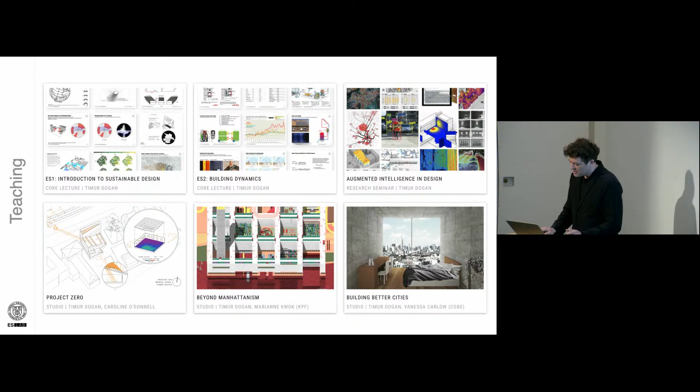I also direct a small research lab, a cross-disciplinary group called Environmental Systems Lab, which currently consists of 3 systems engineering students, 1 planning Ph.D. student, a postdoc, and 6 undergraduate researchers. I want to mention them today and thank them for all their dedication and hard work. You'll see some of the work which without them wouldn't really be possible at all.

So just to start off, what motivates us? I think it's these 2 overarching questions: how do we build sustainable and livable cities for 2 billion new urban dwellers? That's, if you think about it, 250 times New York City, the population of New York City. And then how do we decarbonize the built environment and mitigate climate change? If you look at the diagram on the left, you see that more than 50% really is attributable to the built environment, how we construct cities, how we build our buildings.

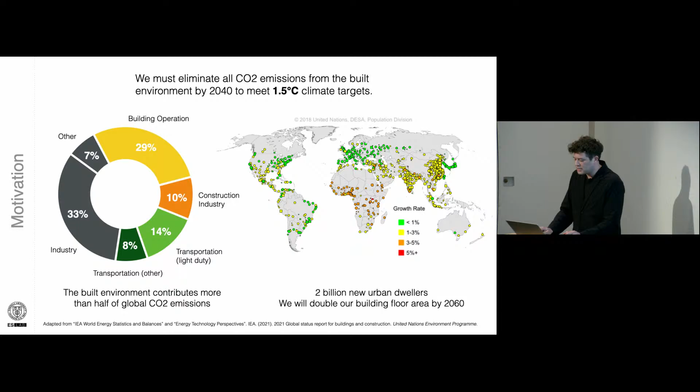The underlying philosophy to me is, coming from an architectural background, I always understood design to be a smart response to the environment, to the context, to the site, and to really enable designers to create these kinds of responses to the environment.

I think we can help that by augmenting and informing the design process with building technology, software tools, and data to help designers arrive at better performing solutions more quickly.

It's a multi-objective challenge where we need to look at many different variables like energy and carbon, active mobility, comfort and well-being, and daylighting. They're all kind of proxies for quality of life, as architects striving to create a more livable environment for us humans.

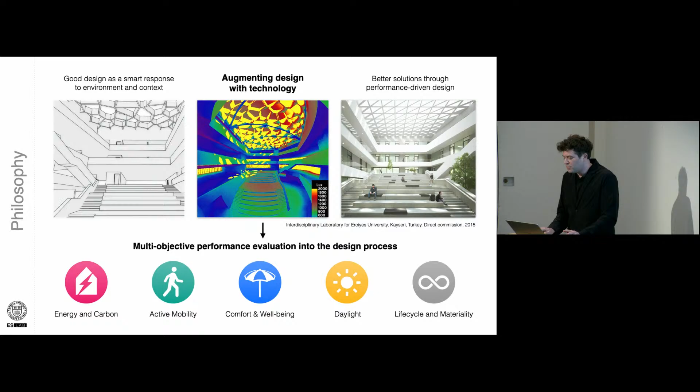In the design process, however, one of the biggest challenges today is that analysis really happens too late in the design process, in the creative process.

This is actually borrowing from a systems engineering theory that came out of shipbuilding. You see the reference at the bottom, where they really researched this understanding of what happens when you bring information and data into the decision-making process early on. You can basically influence the design more radically, more quickly, with a reduced cost.

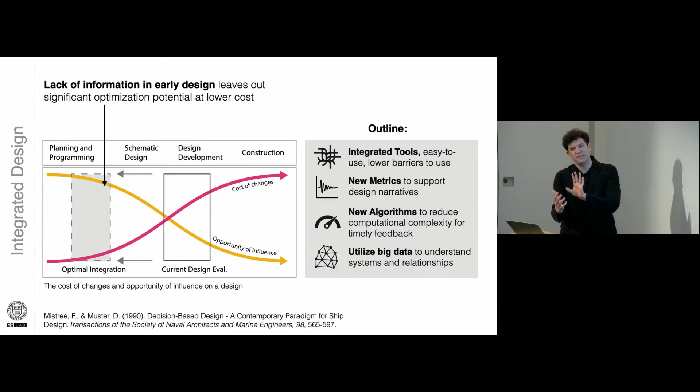So what are the ingredients we need to move this evaluation of design, this use of data in design, earlier into the design process? To me, it's four components. On the right-hand side, integrated tools that are easy to use and lower the barrier of entry to people who are designing, who are creative thinkers but not necessarily trained as engineers.

We need new metrics that support their design narratives, not necessarily the established way of measuring performance in a building. And we need new algorithms to reduce the computational complexity, to be more responsive, to give feedback in a timely manner.

And the fourth one is about the use of data and big data. We're collecting more and more data of our built environment, of our daily lives in cities. How can we leverage that as designers to create more informed design decisions?

I want to share a cross-section of my work that touches upon these four main points today. So, integrated tools—this is a screenshot of a software called ClimateStudio, an advanced daylighting and energy simulation tool that seamlessly integrates into Rhino, a popular design environment, and provides direct visual performance feedback during the design process.

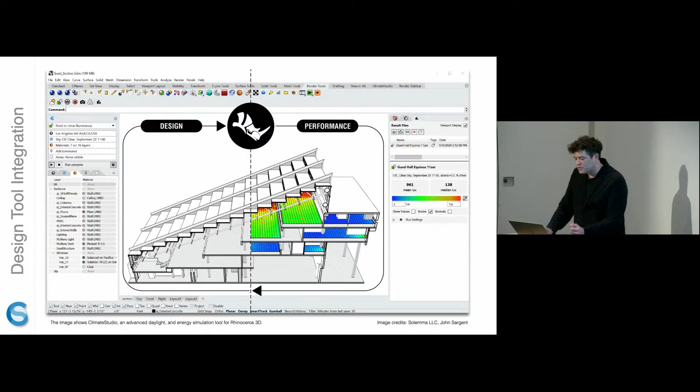This software has its roots in what Christoph mentioned, the early times when I was still a student working with Christoph and three other collaborators back at Harvard and MIT. It's one of those tools that offer highly integrative workflows directly embedded in an architectural design environment, and it's used widely in practice and taught in over 400 universities worldwide.

Just to show you how you could use a software like that in the design process, I'm going to walk through a really quick case study. I'm not going to do the architecture justice, but just to explain the principle.

Imagine you had a highly insulated house with very low thermal mass. In this case, it's a school built out of hay blocks in Denmark, where you quickly see that with the amount of openings you're controlling here, you get an overheating problem.

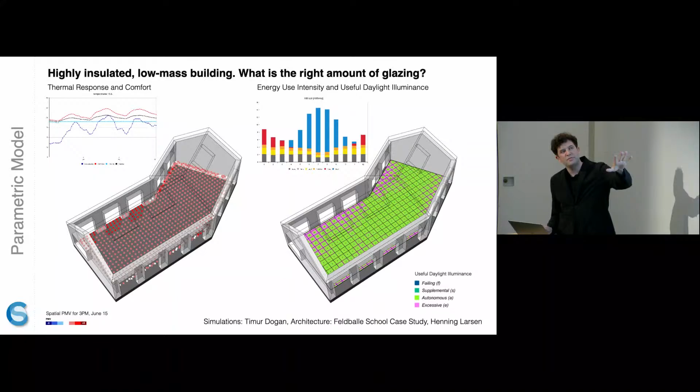How can you mitigate that? How can you find the right balance between the openings that are there for views and daylight, the energy consumption that's a function of that, as well as the indoor thermal comfort, mapped spatially here, where red basically shows overheating due to the increase in solar gains and the mean radiant temperature in the space.

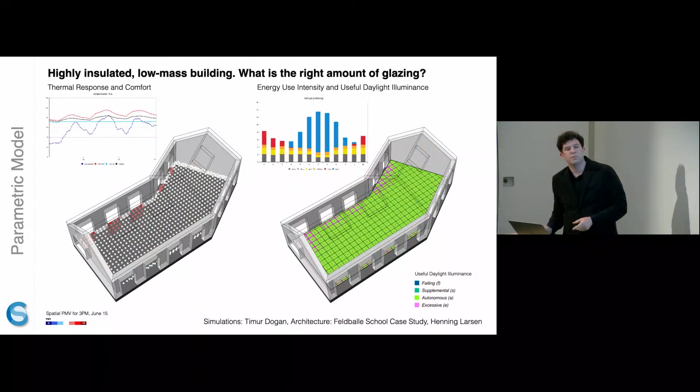With this being easy enough that any design student in the world can do this kind of analysis quickly, it really becomes more about the intellectual challenge of connecting these analysis methodologies with the design narratives.

That's increasingly what I find in my teaching, and that's actually the exciting part, where we get to combine design thinking with this kind of analysis.

But we also have to be critical of the metrics that we are using. So as architects, we need to participate in the development of new metrics and make sure that these do actually capture the things that we care about.

Let me give you two examples of some of the recent work that we've been doing. This is showing you the state of the art of daylight analysis in buildings. We're looking at a 3-dimensional model where we can simulate the illuminance profiles in that space. And then typically what we do is pair this with an occupancy schedule and a target illuminance that is a minimum requirement in the space so that you can perform your seeing task.

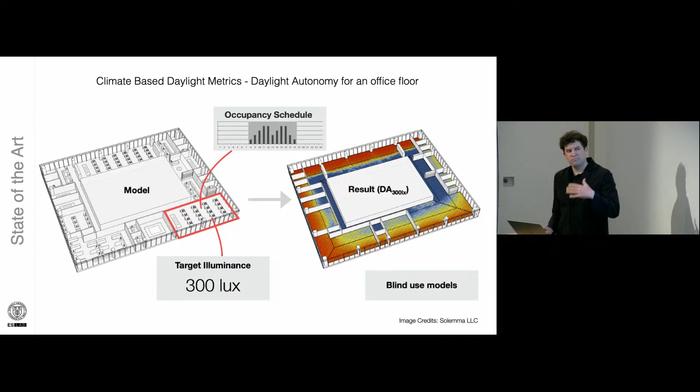That can be summarized statistically in a metric that we call daylight autonomy, which you can see plotted on the right-hand side. It's a great metric, don't get me wrong, but it's primarily developed for work environments. And the question is, can we translate that into other building uses, for example?

When I think back to my time as a student, I was thinking very differently about daylight in architecture, especially in residential architecture, where the presence of direct sunlight is not always a bad thing, whereas in the office environment we think about it as a glare problem, and the way we diffusely light a space in a residential architectural setting.

This is work by an undergraduate student who I actually met in my first semester at Cornell, which was very exciting to work with him over the 5 years of his B.Arch degree, where he basically dissected the way we really simulate daylight in buildings.

He looked at whether we can visualize the amount of light in these seasonal and diurnal bins and then talk about it more qualitatively. You can see there's a drastic difference, obviously, and the average that we tend to always look at as daylight simulation modelers is not really conveying the temporal differences.

So in the winter evenings and winter mornings there's barely any light in the space, and then in the summer you have a fully lit, fully daylit space.

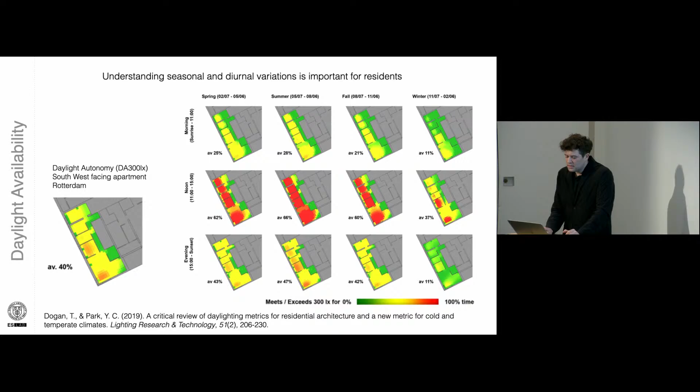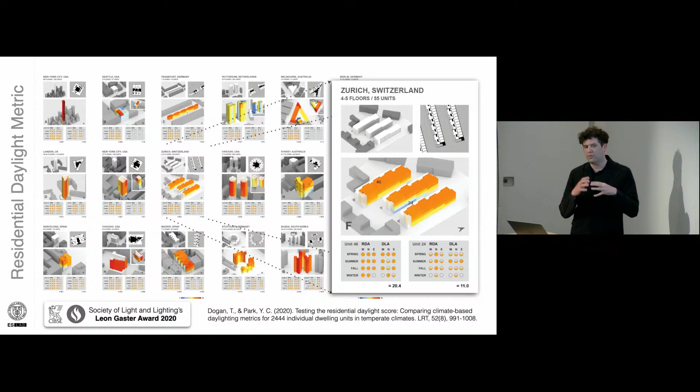This is coming out of a series of papers talking about the subject matter, and I think the final result was the scorecard, where you could quickly see which apartment really is for you. With just a glance, you can understand when this apartment has access to direct sunlight, when it's sufficiently lit by daylight, and when there's not enough light in the space. So you can understand the temporal fluctuations really quickly and think about what that means for you as a potential occupant.

If you're more of a morning person, you really do want the direct sunlight on the balcony or on your kitchen window or so forth. And if you're more of an evening person, then maybe the evening sun is more important. I think that's something this metric highlights really beautifully.

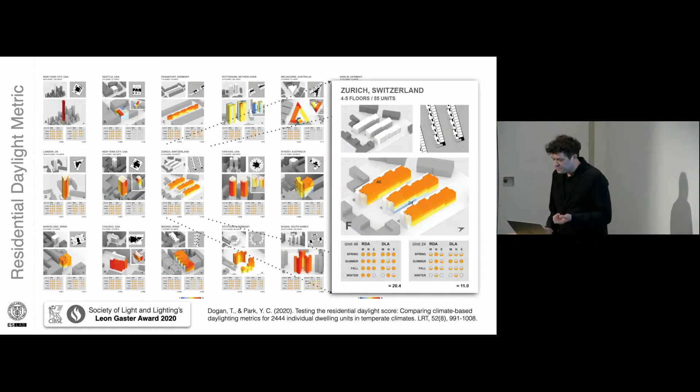The second example that I want to bring about is talking about view. We consider that a design quality, talking about views to the outside, and view relationships between spaces on the inside.

As you can see in this example, I think you all know the architects, but they were clearly thinking about that. There are diagrams that are evidence of this, and there's a beautiful way of dealing with spaces that orient themselves towards the outside, look outside, and have a clear view relationship with the outside, and then spaces that are much more introverted, that look inwards into a courtyard, or have relatively smaller openings to the outside to frame the views.

These ideas are really difficult to grasp in building science terms, let's say. We all know that there are benefits to view. In hospital wards, patients recover more quickly with view. There's measurable work performance in spaces with good view. And Christoph Irmak's work and Andreas Czegut's work showed that there's an increase in real estate value if you have good views.

But the metrics that we agreed upon as a practice or as a profession, like for example LEED's view analysis and the European standard for measuring view, really shortchange architects in that kind of way of thinking, where it's more of a pass-fail, just preventing the worst-case scenario, basically a windowless building.

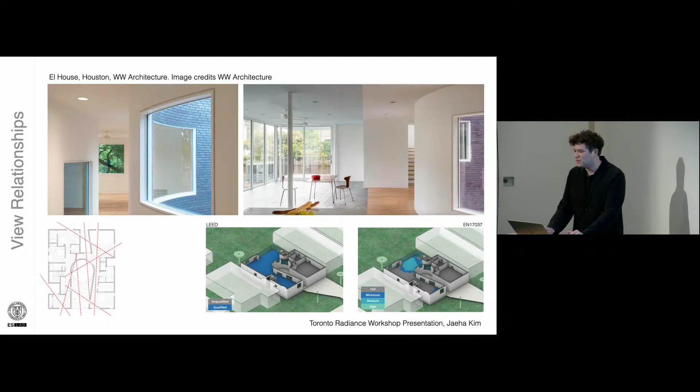So we started this multi-university research initiative where we started thinking, together with Stefano Schiavon at Berkeley and Won-hee at New Jersey Institute of Technology, about ways we could collect data together in a meaningful way, coordinate experiments, and plan how to collect data so we can capture all the different nuances about views. We're planning online surveys, VR experiments, and asking fundamental questions like how you can use VR experiments for these kinds of analyses, and how the results might be biased.

This is more of a long shot, but there are some preliminary results I want to share. This is work by a PhD student in my lab, Jae-ha Kim, who developed this survey as preliminary work and input around 1,000 different view scenarios. We now have over 300 participants who ranked these 1,000 view scenarios, so we have a very diverse set of view scenarios that hopefully capture what one would encounter in a design process.

And then we trained a machine learning model that can do this view satisfaction ranking of the space, and you see much more fine nuances in the results. Again, this is preliminary data.

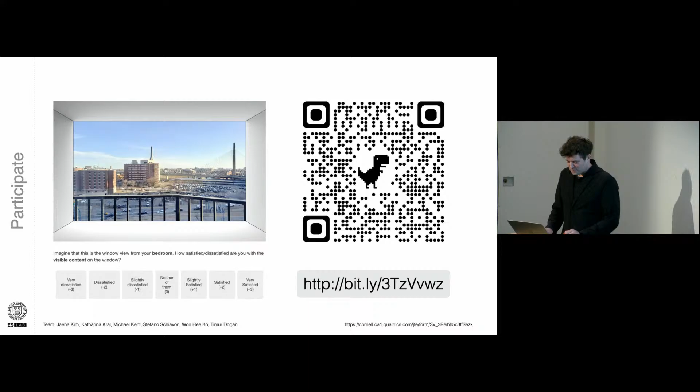All right, I'm jumping in scale from building scale to urban scale. So when we talk about buildings and design them, looking at what happens around our buildings is also important, and as designers we do care about that, and our design actually has a huge influence on that as well.

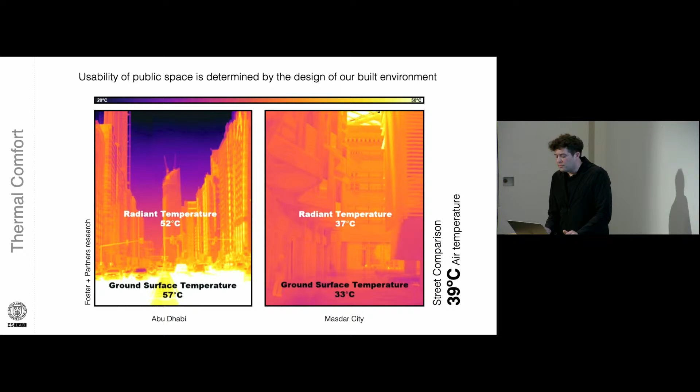I always use this photograph by Foster and Partners that they did for pitching their design ideas for the Masdar City design in Abu Dhabi. This is both in Abu Dhabi, one shot taken at the city center with streetscapes that are basically unbearable to walk in or spend any time, and then using more vernacular strategies with buildings and self-shading, you can drastically lower the outdoor thermal comfort issues you would encounter in the same climatic environment.

Here we have really good metrics, like one of the popular metrics to measure outdoor thermal comfort or the human response to the microclimate, called the Universal Thermal Climate Index. It's basically a very simple model where you input a bunch of meteorological parameters, and they have a simple fitted function that saves you from doing all the modeling, like the clothing model and the heat transfer model, and it can predict the heat stress you're facing.

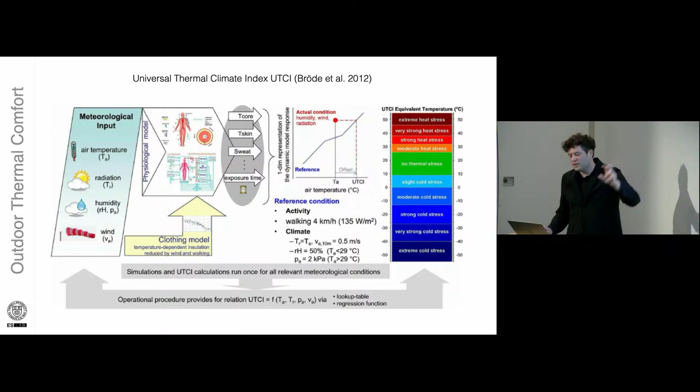But the challenge is, you can measure these with weather stations, right? When you're doing a design, though, you have to have some way to predict these meteorological inputs. You need to predict air temperature, radiation, humidity, and wind. There's been a lot of great work coming out of MIT, I'm thinking of the Urban Weather Generator by Les, which we use quite a lot to predict temperature, radiation levels, and maybe humidity levels. But the wind variable turned out to be a huge issue for us.

And so we developed a software tool called Eddy. Some of you have maybe used it and struggled with it - I think that's just the nature of CFD. But we tried our best to implement and automate best practice guidelines in CFD to make it as easy as possible to use and to run these kinds of CFD analyses in early design.

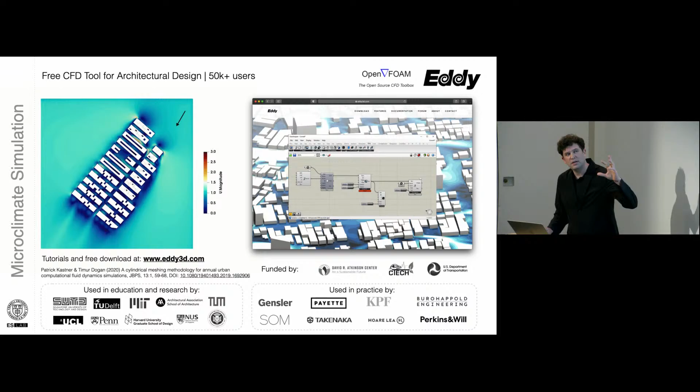There's also an MRT component within it, so it's a multi-physics simulation that we also validated over long periods of time through measurements on campus. I don't want to bore you with the details, but it worked pretty well.

And why should you care as a designer? So this is kind of...

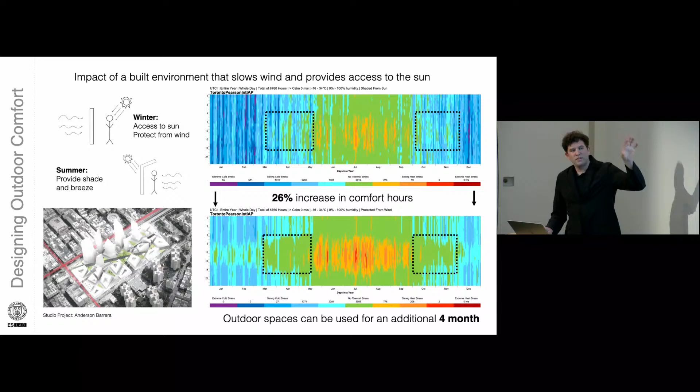This graph came out of a collaboration with Sidewalk Labs, and then a student took it further in a design studio, thinking about what strategies in Toronto you could use when developing the waterfront, and what you could achieve if you designed with the microclimate in mind. The strategies are simple: protect from the sun in summer and expose people to the sun in winter, shelter from wind in winter, and expose people to wind in summer. If you achieve that through this diagramming, what does it mean for thermal perception in outdoor spaces?

You achieve a 26% increase in comfort hours. What does that really mean? If you look at the diagram at the bottom, it's basically 4 additional months where it's comfortable outdoors. I think that's a huge value proposition. Think about a restaurant owner who can use outdoor seating for 4 months longer in the year, or a person walking or biking, or even motivating that person to walk or bike, if your city is comfortable for 4 more months in the year.

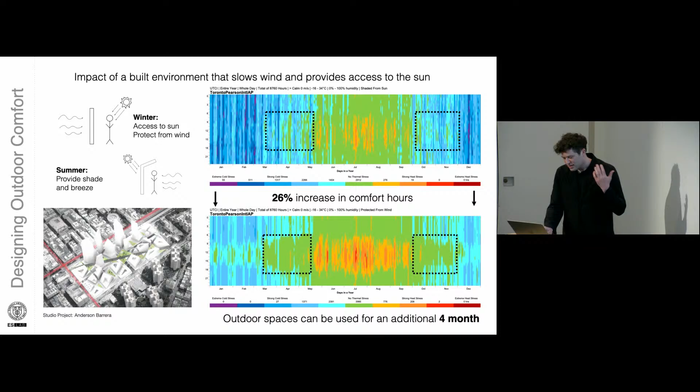And I already alluded to it: using Eddy is still painful. It's very, very slow, and the huge bottleneck is the CFD. So we've been thinking long and hard about how to make this faster.

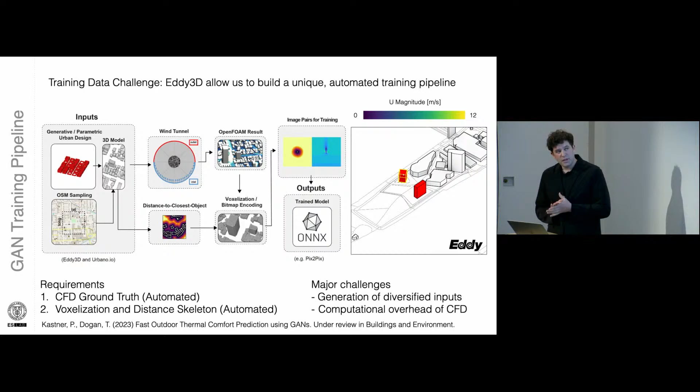We started training a surrogate model using a generative adversarial network, a very popular one in style transfer called Pix2Pix, where ultimately the challenge in this project was providing all the training data. So we used a highly automated training pipeline. We bought lots of fancy big computers and let it simulate for over a year. This is a trained model after a year or so of simulations, where we're pairing a ground truth image with a rasterized top view of the city, and the model learns to do the style transfer.

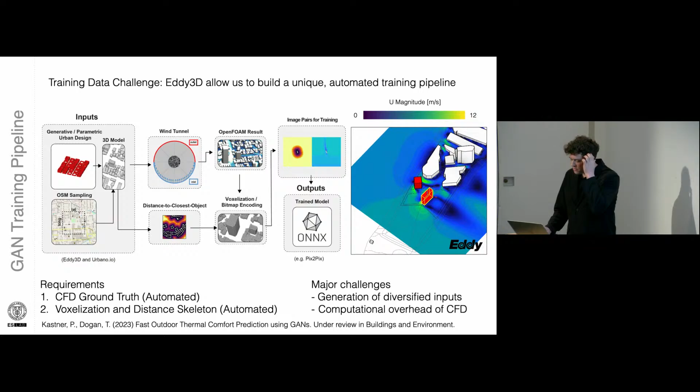It learns how to paint in between the building masses these CFD responses. And what you see here is not sped up—it takes just a few milliseconds to compute the wind patterns at pedestrian head height. That, for the first time, allows you to interactively play with these CFD simulations, pushing and pulling massing around. It's quite surprising what it can do, and it's also important to mention what it can't do.

What you see here is a comparison of these predictions using the GAN versus simulation results simulated with OpenFOAM. It's quite remarkable how well it gets the overall picture, and this is with an already outdated model trained in the winter—by now we have a lot more training data, so we should probably try again and see if we can get rid of some errors. But it's important to know the overall average result is pretty good. There are some spots with severe errors, especially where there's turbulence or jets forming that the GAN just doesn't know how to replicate.

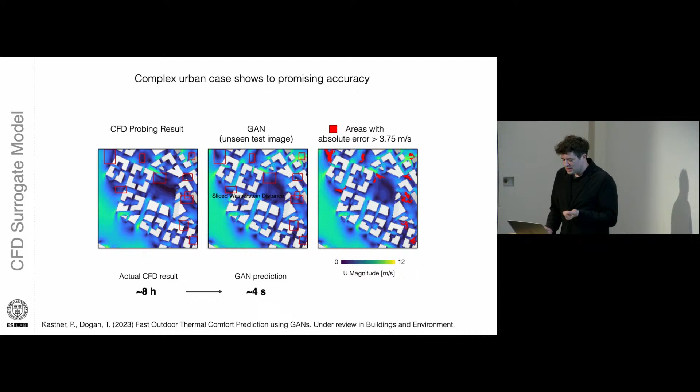So this is an exciting research project that I think is still ongoing, so stay tuned. Now, that brings me to my last talking point.

As I said, we are collecting more and more data about our built environment and how we live in it. I'd like to talk a bit about tools that help us leverage this data in design, and help us understand systems and relationships embedded in this data that aren't always immediately visible. And I want to start with...

mobility, in a sense, right? We said we're interested in designing sustainable cities, and almost 30% of that was mobility related when we talk about carbon emissions in cities. So can we design or redesign our congested cities and make them more walkable? There's a lot of benefits attributed to this: health benefits, financial benefits, property value benefits, and of course the reduction in greenhouse gases.

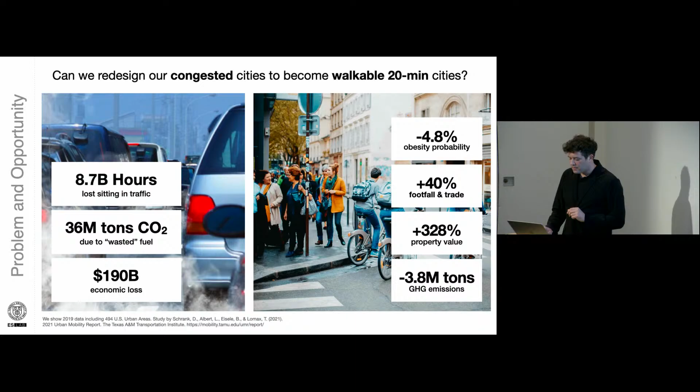So we started, again, trying to leverage publicly available data. We collected data from the census, and from the Federal Highway Administration, which runs travel surveys, and in some states they do this with add-on data that provides us with a pairing of demographic data with origin-destination matrices—so where do people go, for what reason, and what mode do they choose.

And that data we leverage and combine with all other important urban data that you can use to describe the built environment, like job counts, population densities, and so forth. And then with this data set, we trained a series of models that do the activity choice, mode choice, destination choice, and trip length prediction all in one go.

And then that allows us to basically simulate mobility patterns in cities. We can simulate things like visitor catchment, where people spend time, creating this OD matrix of trips. And then we use a fairly standard kind of mechanism to route people through the city depending on the mode. That's kind of our raw data.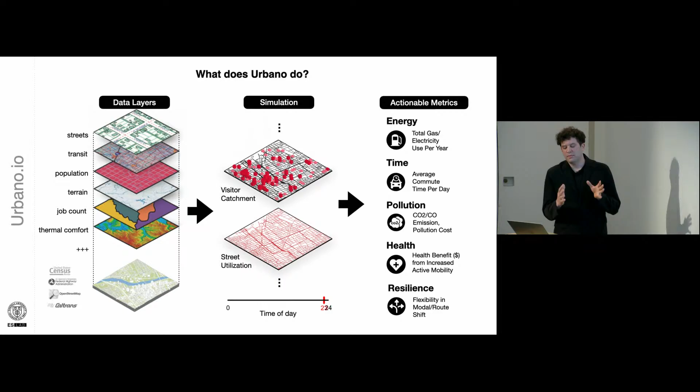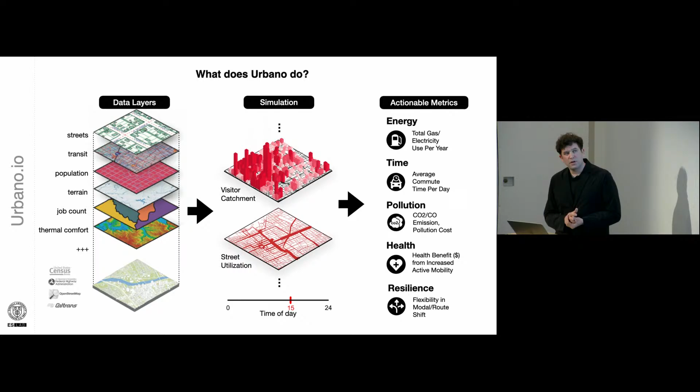And from that data, we can then infer energy use, or how much gas people will use, or how much electricity if we talk about electric cars. We can infer how much time they spend commuting. We can talk about pollution. We can talk about health benefits, and we can talk about resilience.

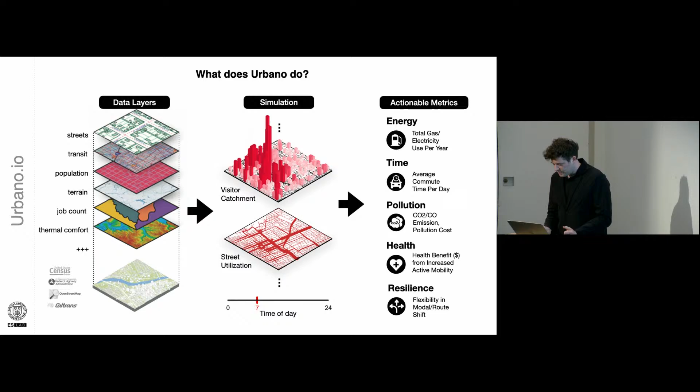But we do have fairly good data on that from the census. So comparing that, it's kind of remarkable that just with this kind of publicly available data, you can then predict mobility patterns that are basically indistinguishable from cell phone data. And if you think about that aggregated cell phone data, getting access to that is very difficult, or expensive, and therefore really not easily accessible for designers.

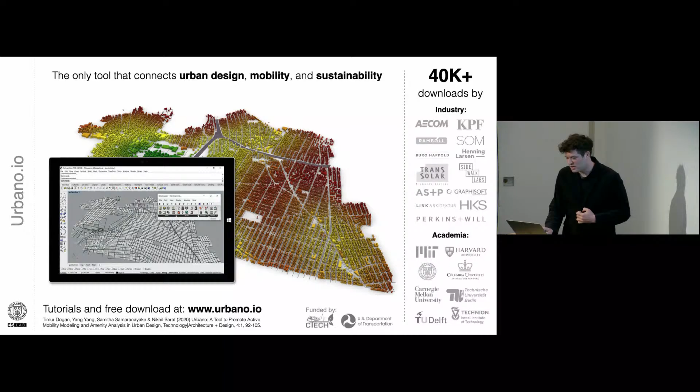Now, the city of Ithaca, where Cornell is based, is a very small city, but very progressive. They decided they want to be carbon neutral by 2030, so we volunteered and jumped in, saying we'd like to help, leveraging some of the modeling techniques we've developed to guide policy making and inform decision making.

If you look at this estimate from the city, 40% of carbon emissions are estimated to be from building operation, and the other 40% from transportation. The strategies we suggested to look at are: electrify the mobilities and vehicles, shift more towards active mobility modes, leverage and change the way we think about energy supply, and look in depth at the buildings to see where they need to be upgraded versus where we can simply swap the systems.

This is a project I'm doing together with my colleague Felix Heisel, who's very interested in turning Ithaca into a circular economy.

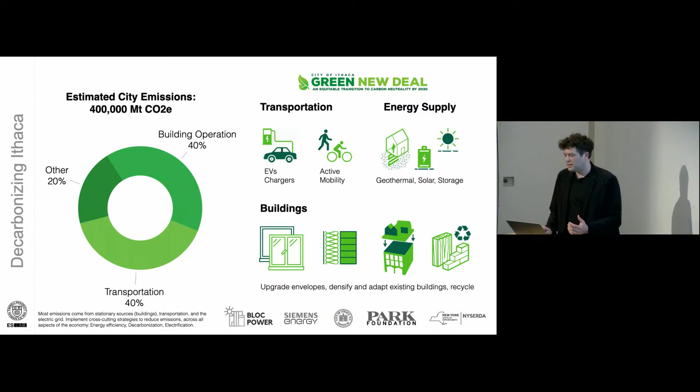So I talked about big data and data availability, and now we basically find it's all about big data gaps. We can't easily do this in a city like Ithaca, even though they have a very, very good planning department that curates all the data they manage, but it's still not enough.

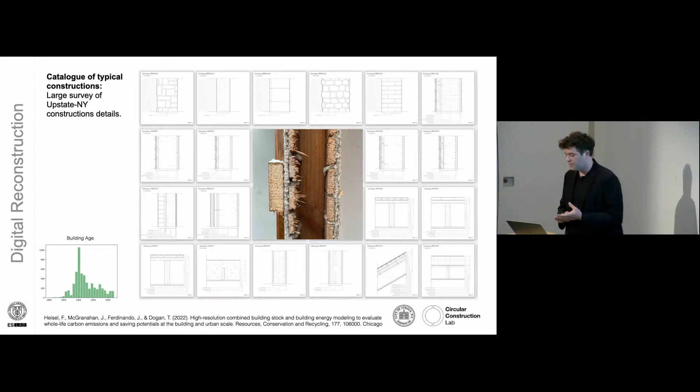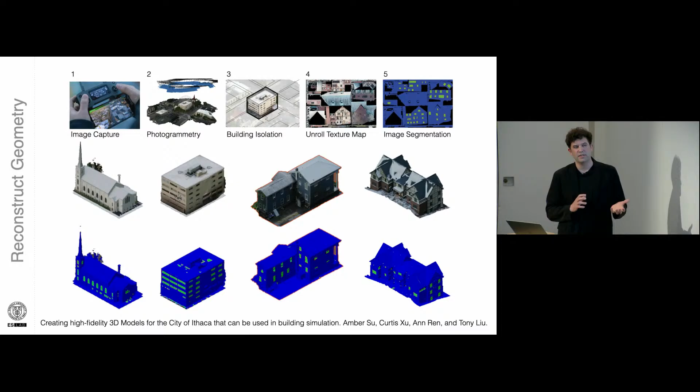So we started off by creating a catalog of construction typologies to really understand how the buildings are made, what they're made out of. Then a student team took a bunch of drones and developed workflows to create photogrammetry models, segmented models that let us understand how much window area a building has, how much facade area, and how much roof area.

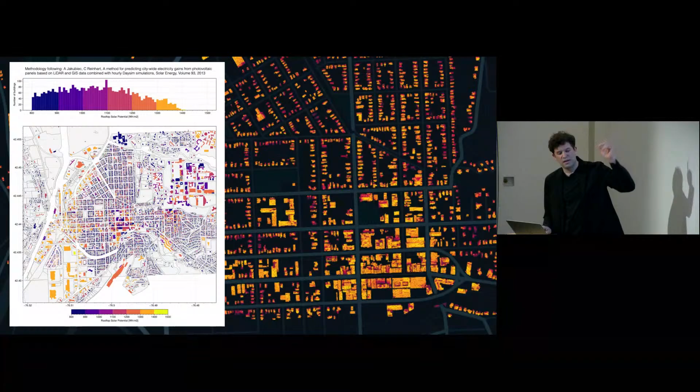That allowed us to create a solar map showing the photovoltaic potential on every rooftop, taking into account vegetation and so forth. This is modeled after a method that Christoph and Alstan developed here at MIT, and we applied it to the city using these higher fidelity 3D models that we had created.

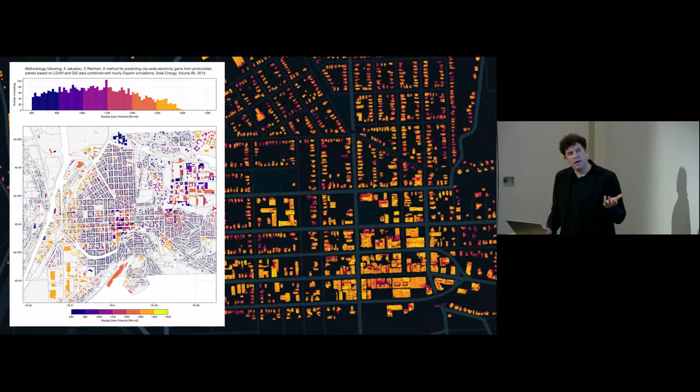We also built energy models for every building in the city, and now we can compare the two: the production potential and the demand.

You can see in these scenarios plotted here, this is the total energy consumption of the city of Ithaca, all buildings aggregated in monthly shape. We're planning that with electrification alone you can basically push the red heating curve, or gas consumption, down to somewhere where the dotted red line is. Then plotted against that is the PV production potential.

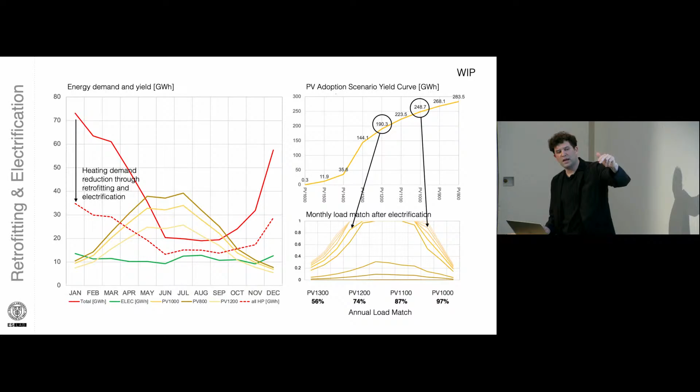We're trying to understand how much is the right amount of PV on the rooftops, because as you saw in the map before, some roofs are great for it, like big box stores, while other roofs with a lot of small single-family houses may not be ideal for large PV installations. This is work in progress, but what you can see on this chart already is that on paper, decarbonizing the city is probably very doable. If we choose a more ambitious scenario, we can get a load match, at least at the annual level, around 80%, maybe even going to 90%, which I think is a little bit unrealistic.

But that's not taking into account hydropower that we have. It's not taking into account solar farms that are on agricultural land, for example. So I think Ithaca has a lot of potential to green its grid. The on-site PV doesn't have to do it all. So this is very, very encouraging, right?

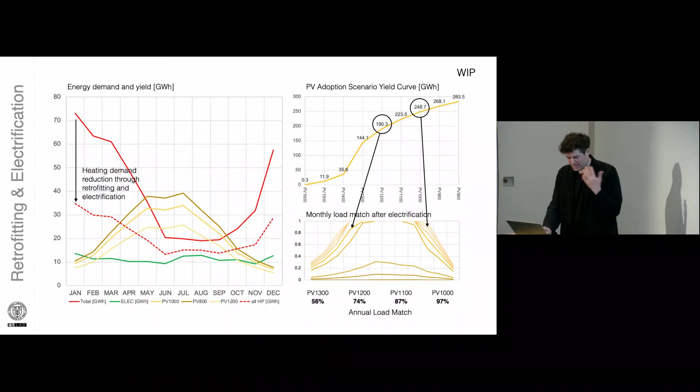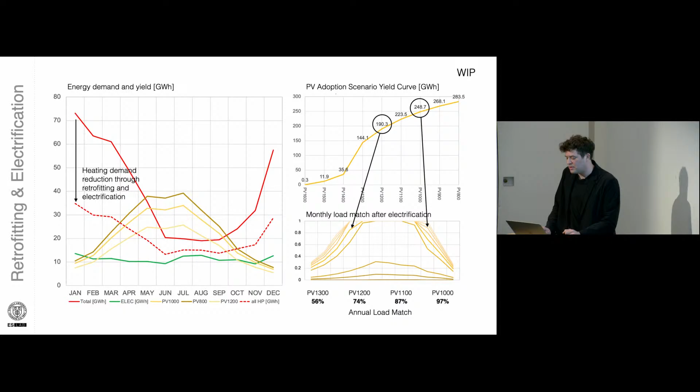So you might ask, why is it not happening? Why is this not happening, and quickly? I think there's a couple of things we need to address that are maybe beyond the engineering solutions for this. I think the technology is all there, and the potentials are all there, and now it's really time to make decisions, and we have to involve everyone in this.

I think this was a big part of the Ithaca Green New Deal - equity and justice. I just had a wonderful conversation with Christoph about how there are actually incentives out there that work against decarbonization and that can potentially threaten people to be gentrified out of their own home. Because if you invest in your house, if you renovate it, your property tax will go up. And all of a sudden, people that invest money in decarbonizing their home might actually be priced out of their own house. So there are policy level challenges that have to be overcome.

And then, of course, we have to think about how do we bring people on board. And then once we achieve that, how can we actually do this? 2030 is not that far out, and I don't think there are enough contractors to renovate Ithaca in that time scale. So we have to really think about ways to accelerate renovation work, think about ways to do this in a non-disruptive manner.

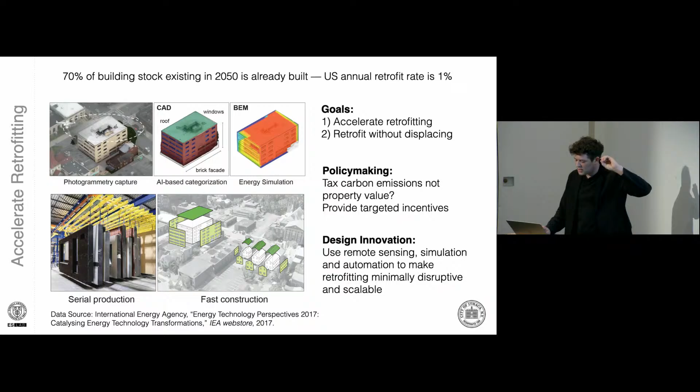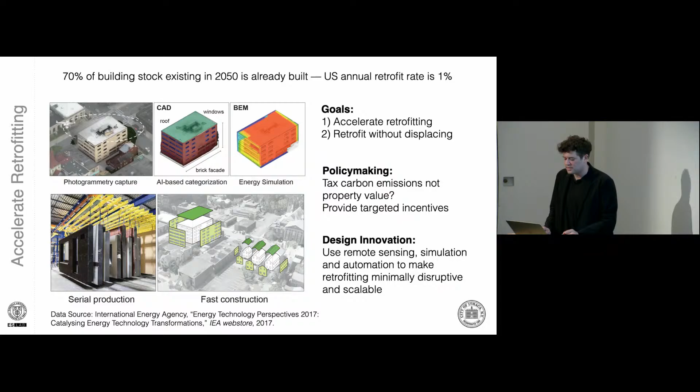I'm kind of just copying an idea here from the Dutch, called the Energiesprong Initiative, where they're trying to serialize the production of retrofitting panels. And of course, that works on simple geometry as well, but Ithaca's houses are very complex and very playful. So how can we do that? I think that's a huge challenge to deal with.

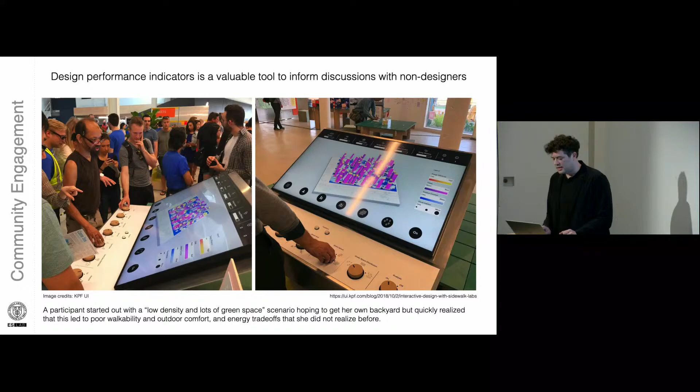And so I hope I showed a cross section.

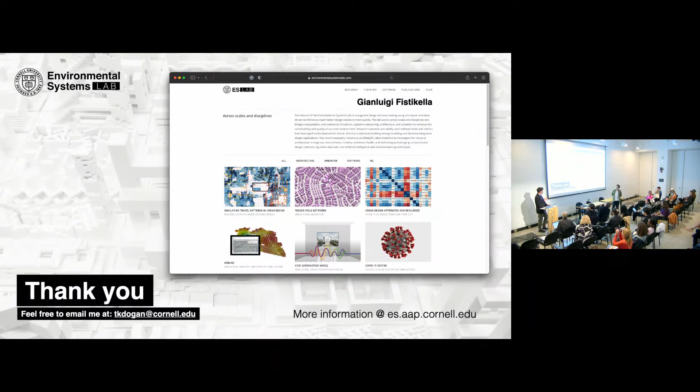Yeah, and I think it goes even beyond simply thinking about embodied carbon content. It's not my specialty, but my colleague Felix is working on that in depth. I think they're really thinking about how can we disassemble buildings instead of tearing them down when we have to - basically taking buildings apart and putting them back together in different forms.

So it's a huge economic question - how do you create a market where you can actually buy, say, a door or a beam that was in an 1830 house before? There are local collaborators like Ithaca Reuse Center that have a huge yard where they store these materials, so they're testing that out and understanding how it's impacting the economy, this transformation into a fully circular economy, which is of course very interesting.

I think the operational energy consumption is just so pressing to get fixed. It's so pressing, and we shouldn't make the mistake of spraying foam on everything. We should try to use materials that have low embodied carbon content, are somewhat renewable, and recyclable.

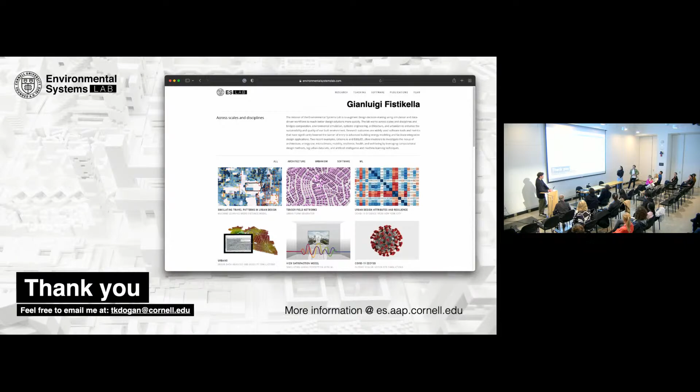I have one last question. Moving towards big data, what do you think is the most exciting part for you about the prospect of having IoT sensing, and you worked with the smart city in Toronto. What is the most exciting and maybe concerning part of that future to you?

Smart cities are scary, for sure. But I think for me the information that gets at the decision making of humans in their daily life is very interesting. Like how do we move about? Where do we like to spend time? I think that's in the intrinsic interest of an architect, because that is a way for you to understand whether you were successful or not in designing the space.

For an architect, that's a very, very interesting data set that I would love to see being collected—the response to spaces, similar to this kind of view exercise that we did. Because if you think about it, the way we do the survey is incredibly simplistic, just so you can get started at least, right? But there are so many more thoughts that go into designing interesting spaces, with view relationships between spaces, between the activities that you're doing in spaces and the people in the spaces. So capturing these kinds of things would be very interesting to understand, and how that impacts your overall happiness or well-being.

Thank you very much. Yeah, thank you so much. Thank you.